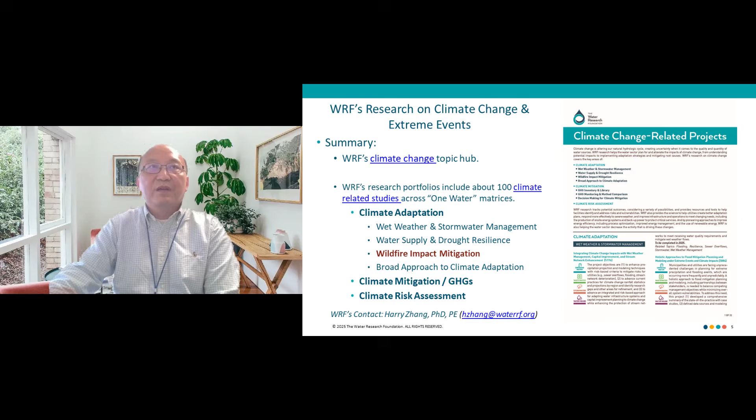Relating to wildfire-related research, on this slide I just want to give you a quick summary of the Research Foundation's completed projects, which you can use for your information, and also mention some ongoing or upcoming projects. On this slide, you can see the Research Foundation has conducted wildfire-related studies on treatment resiliency, distribution systems, source water protection, and water quality impact.

I want to call special attention: the Research Foundation is going to issue one RFP. The title, which is the last bullet here, is Ensuring Resilient Source Water Protection Programs under Extreme Events in a Changing Climate. This also covers wildfire as one type of extreme event.

So this is my concluding slide. I just want to mention two publications released in 2025, this year, including this one, which you're going to hear about in more detail. The other project focused on distribution system water quality impact and was managed by my colleague, Dr. Yan Zhang. I encourage you to take a look at that information. With that, let me pass the podium to Lynn.

Yeah, thanks, Harry. I'll introduce myself. I'm Lynn Stevens. I work at Brown and Caldwell, and I serve as our Northwest Drinking Water Area Leader. Mac and I are excited to present on our study on enhancing drinking water treatment resilience to wildfire events.

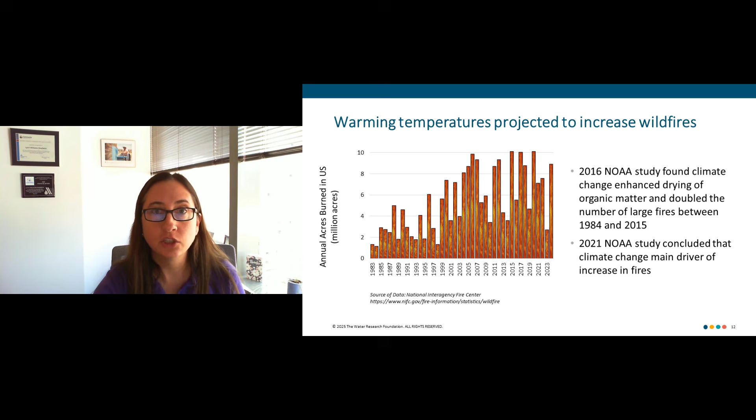So as water providers, we care about the frequency of wildfires because over 2/3 of our water supplies are in forested watersheds in the United States and Canada. So when we have a risk for wildfire, there's also an increased risk to our water supply sources. And this slide is highlighting what the potential water quality impacts can be from these wildfires. So following a wildfire event, burned vegetation exposes fine sediments and silt that then following a rain event or first flush can end up in source waters.

Specifically, we see degraded water quality and increases in turbidity, organics, and metals. And this really challenges our water treatment processes. It causes a need for increases in chemical demand, specifically with coagulants, oxidants, as well as disinfectants. And all of this increases solids loading and can stress the solids handling system. We also see that increased organics can impact our distribution system DBPs.

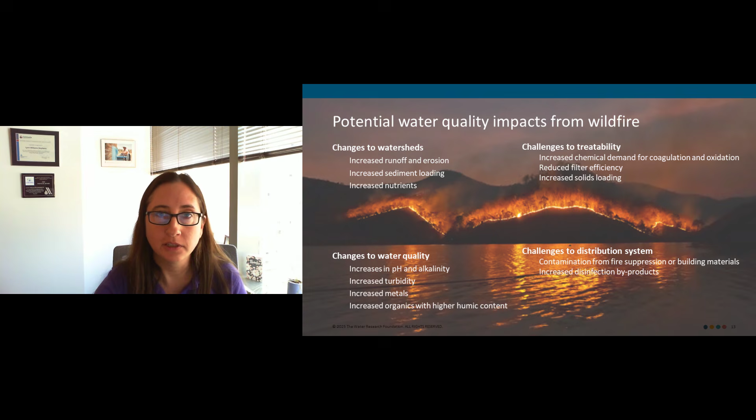So why did Portland Water Bureau want to embark on and co-fund this study? Historically, Portland Water Bureau's watershed hasn't experienced a stand-replacing fire in the past 400 years. But in an adjacent watershed in 2020, the Riverside Fire broke out while they were also planning and designing their greenfield water filtration plant. And to not let a crisis go to waste, Portland Water Bureau was proactive and collected 50 buckets of this ash to try to understand water quality impacts and treatability. And that really was the impetus for this work and this project.

And so this slide is highlighting the study objectives. There are three. The first was to gain operational treatment insight on how to treat degraded water quality from wildfires, to test treatment strategies side by side at pilot scale, and then to inform operational and design recommendations through treatment resilience frameworks.

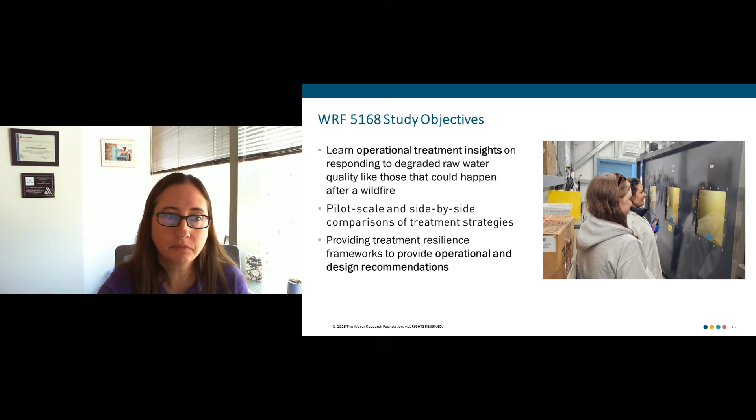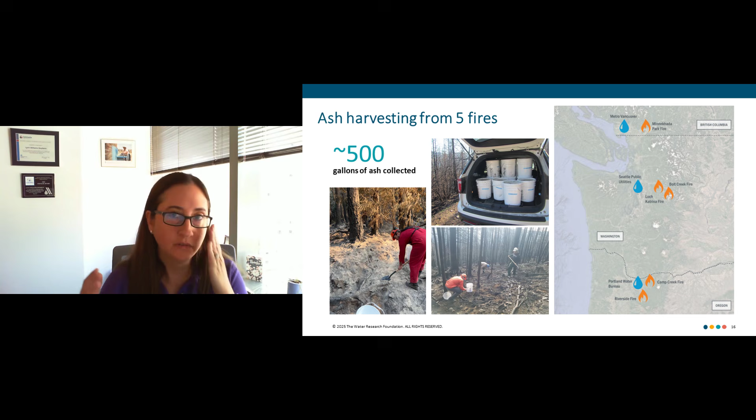So in addition to the wildfire ash that Portland Water Bureau was able to collect in 2020, our partners Metro Vancouver and Seattle Public Utilities also contributed ash. Metro Vancouver contributed ash from the Minnekhada Park fire that you see at the top of the image. And then Seattle Public Utilities provided ash from the Bolt Creek and Loch Katrine fires. And then, unfortunately, in 2023, Portland Water Bureau did experience a fire in the watershed, the Camp Creek fire. And so all in all, from these real fires that occurred in watersheds, we collected over 500 gallons of ash. And then we've utilized them in our project.

So this slide is highlighting our project approach. It first began with an ash characterization to try to think through how you mix ash with water. And then that protocol was the starting point for our bench scale testing, where we looked at different pre-oxidation and coagulation strategies. The bench scale work really set the stage for the pilot scale testing, where we compared conventional treatment with pre-ozonation to conventional treatment with pre-chlorination. And then all of this information and lessons learned really guided the treatment resilience frameworks.

Unfortunately, as much as we'd like to present all of the results from our study, we're limited in what we can present in this hour webinar. And so in the next two slides, we really wanted to highlight some of the assessments that were completed and recommend that you dig into the report to gain further insights and information.

So the first column's highlighting some of the parameters that we tested throughout the treatment process, as well as in full run raw water and spiked scenarios. What was very unique about this study was that we did it at pilot scale. So we could look at filter run times and calculate unit filter run volumes.

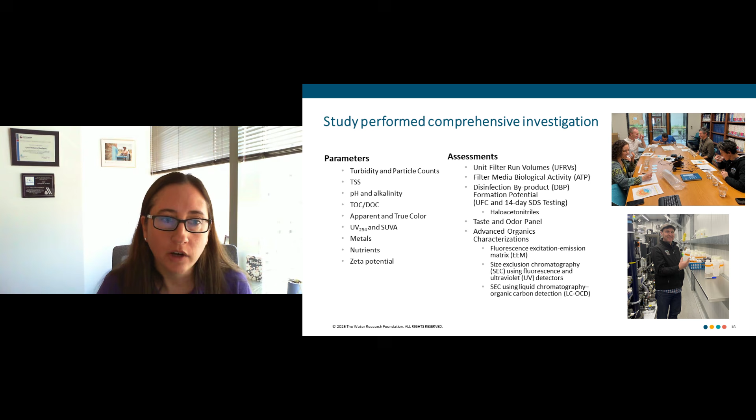When you think about wildfire and when you think about organics, there's a bunch of constituents that are comprising these bulk organic measurements, such as TOC and DOC. And we wanted to understand, how do those organic constituents shift through the treatment process, and how does wildfire impact those constituents? And so we did some advanced organic characterizations. We did fluorescence excitation emission matrix, or EEMs, and then University of Waterloo supported the size exclusion chromatography work that was done for the project.

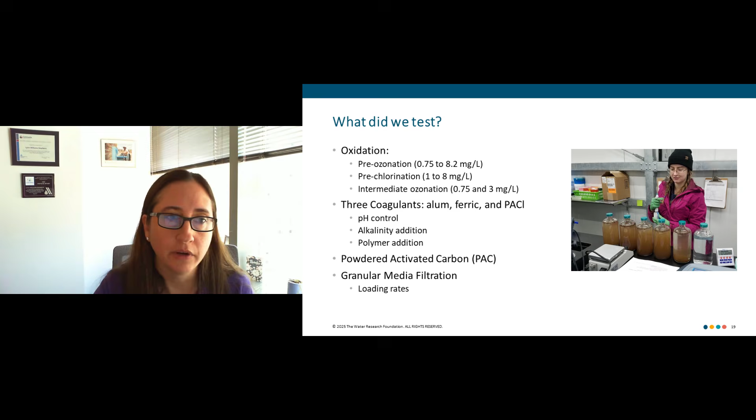We looked at a bunch of treatment processes. So for oxidation, we looked at pre-ozonation, pre-chlorination, as well as intermediate ozonation. We looked at 3 different coagulants, as well as several different coagulation approaches. Over like 25 bench scale coagulation tests were performed. We also looked at the value of adding powdered activated carbon. And then for filtration, we looked at granular media filtration with anthracite sand and examined different loading rates. So now I'd like to highlight our ash characterization and bench scale treatability findings.

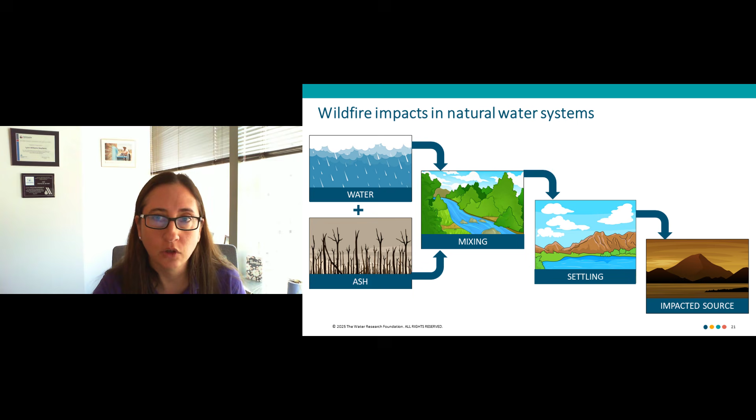So one thing we wanted to do was really try our best to simulate in this ash characterization work how a reservoir system would look as ash runs off the environment, mixes in source water, settles, and then is taken up in the intake of a water filtration plant. We didn't want to try to predict what a specific raw water quality impact would be for a specific site, because that is really dependent on your watershed characteristics, the wildfire severity, and even hydrology. The goal of this work was really to create a range of starting scenarios so we could look at treatment efficacy to those conditions, and hopefully through a broad range of scenarios represent what might happen to a specific utility.

This next slide shows our range of water quality that we developed and the average water quality conditions at bench scale. The project developed a specific protocol for mixing ash through that ash characterization work. And so the average values that you see in this plot are based on dosing 10 grams per liter of ash, mixing for approximately 60 minutes, and then settling for 24 hours. You can see the Bull Run raw water unspiked. That's the first column furthest to the left. It's pristine raw water quality with turbidity typically around 1 NTU, and organics, DOC and TOC also around 1 milligram per liter.

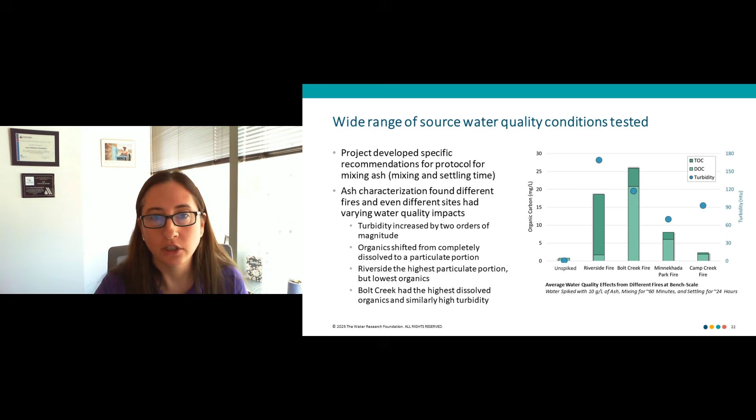You can see that when we added the Riverside ash, that the turbidity increased by more than 2 orders of magnitude, but it didn't have as great of a dissolved organics impact as some of the ashes that are shown on the slide. For example, the Bolt Creek had the most significant dissolved organic fraction from that ash, just over 20 milligrams per liter. And then we found with the Minnekhada Park Fire ash that it had more recalcitrant compounds that made it even more challenging to treat than the Riverside Fire, even though its turbidity was lower.

This next slide is showing what pre-oxidant demands looked like at bench scale. Wildfire impacted source waters exhibited a higher ozone demand. You can see the raw water or Bull Run water on the plot to the left, and then the Riverside Fire ash represented in the middle, and then the Bolt Creek Fire ash on the figure on the right. And we started out using dosages that you would typically see at a full-scale water treatment plant, which are represented with the 0.75 and 3 milligram per liter ozone dosages.

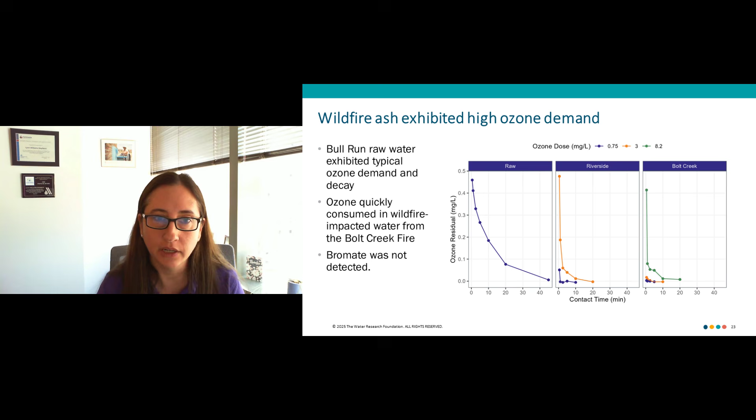We were not able to get a detectable residual after 30 seconds with the Bolt Creek Fire ash until we dosed it up to 8.2 milligrams per liter. And so based on this testing, a starting organic level as high as that range may be more challenging for a water filtration plant to treat for an extended period of time. This next slide is summarizing our findings from the ash characterization and bench scale work.

Highly recommend that folks check out the report, because there's a lot of good information in the report that we weren't able to get to in this webinar. But what we did find was that wildfire drastically increased the oxidant demand. I showed that in the prior slide, but we also saw that with coagulant demands.

And then when we evaluated the 3 coagulants, ferric, PACl, and alum, we found that alum produced the lowest turbidity, and we selected that for pilot testing and further evaluation. It was also middle of the road in terms of the dose that it required and its removal of organics, as well as not lowering pH and alkalinity to increase corrosivity of the water.

The high ozone demand exhibited at these organic levels may not always be practical. And so in pilot testing, we also investigated sub-demand dosages to see if we could evaluate and assess treatment benefits. So with that, I'm happy to turn the presentation over to Matt Gifford, who's going to talk about our pilot scale testing findings.

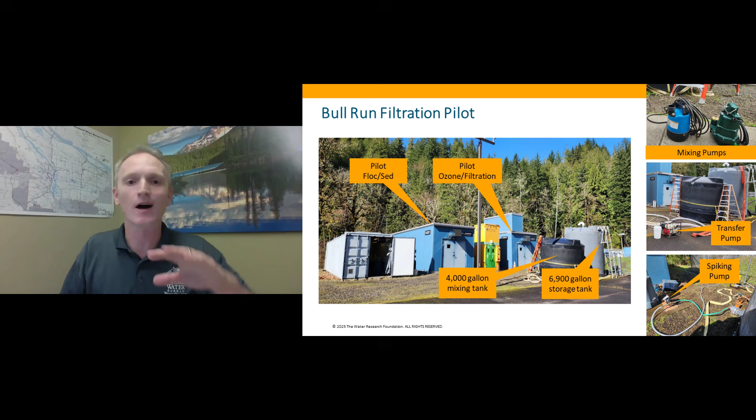The smaller black tank we used to mix up the ash, and then we could pull the supernatant over into that larger gray spiking tank. We also used a whole bunch of different pumps, some pumps there to provide the mixing, transfer pumps to move it all around, and spiking pumps, all this equipment necessary in order to conduct this work at pilot scale, which presented a bunch of unique but fun challenges.

Let's take a look at the ash and the water that were used to create these treatment scenarios. We had 90 to 100 buckets worth of wildfire impacted material, I'm loosely calling ash, to use. We were very thoughtful and intentional in knowing how much ash to mix into how many different batches of impacted water that we made up.

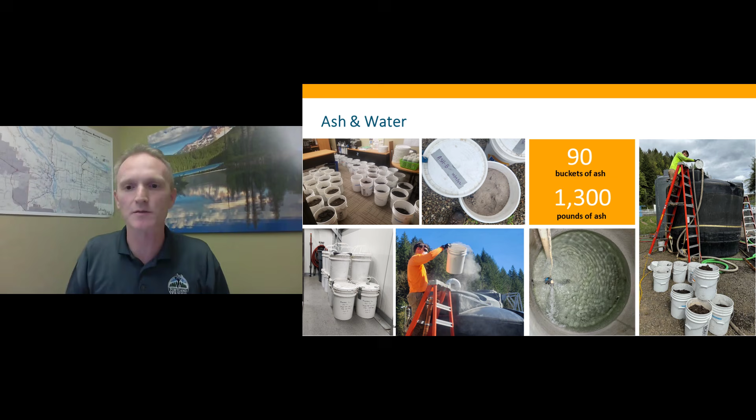There's one picture there down in the bottom center of filling up. That's looking down inside the tank, and we're filling that up with raw water directly from our intake, with a sump pump down in there that's starting to provide some agitation for mixing, but it really tries to capture some of the scale of how big some of this effort was.

And then we can look at the mixing and the settling. So over there on the left, you can see where those sump pumps are kind of buried in there, but are providing agitation and mixing energy. This is similar to what might happen after ash runs off into streams and rivers, providing mixing energy, and those water quality impacts are imparted into the water.

And we were very intentional, using results from our ash characterization bench scale studies to know how long to mix it for before we shut those pumps off and let the water settle.

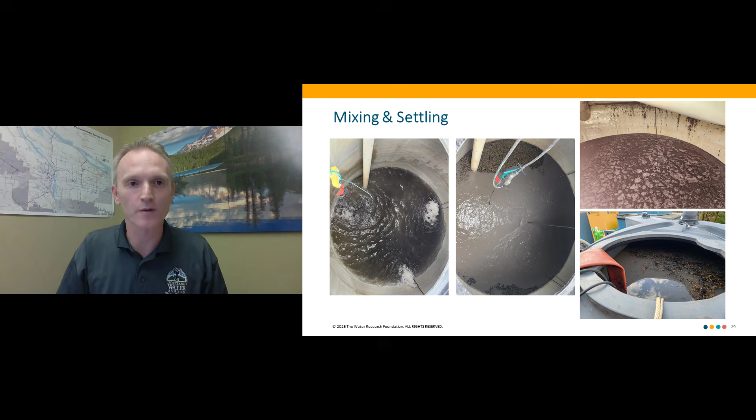This is similar to what might happen in an online reservoir or a lake, where the heavy dense material kind of falls off on its own, but that lighter fluffier material and those water quality impacts that have been imparted are going to partition off into the water. And we took that supernatant and fed it off into the pilot. But very dirty water is kind of the takeaway here. And that's a challenging day if your intake looks like that.

We were successfully able to create some meaningful wildfire impacted scenarios. So compared to our raw water there in the gray, we spiked this ash impacted water in three different distinct spiking phases. One dominated by the Riverside fire ash, and this one was meaningfully created to produce a sort of a low impact, but more chronic, long-term trade-off with turbidity and TOC and other water quality impacts, going up to a moderate impact scenario using the ash from the Minnekhada Park fire, and then that high impact scenario with the ash from the Bolt Creek fire.

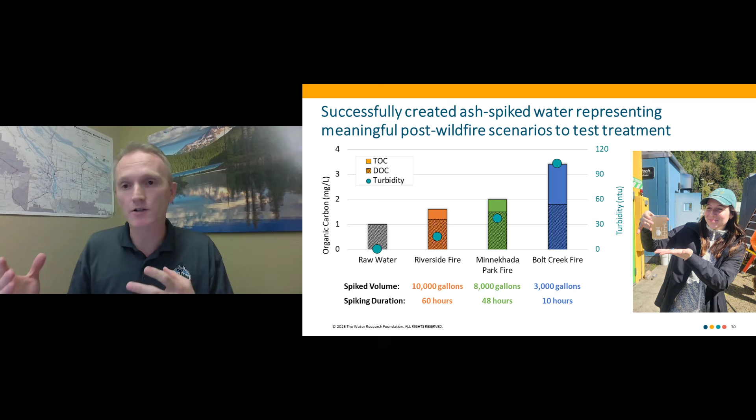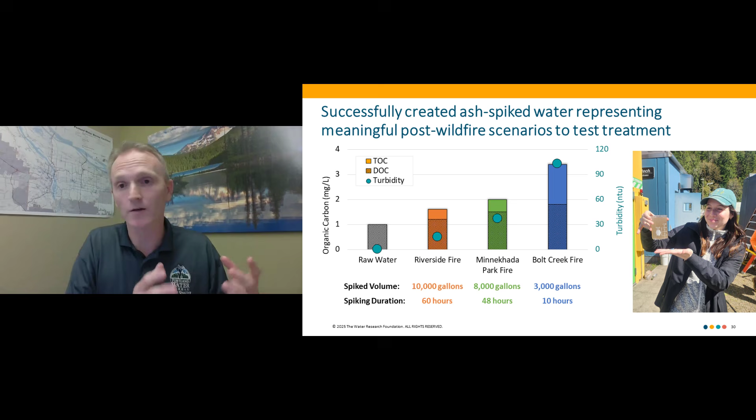There were trade-offs here. These are not super crazy high turbidity or TOC numbers by absolute standards, we recognize, but they did provide meaningful scenarios with which we could challenge our treatment systems in ways that we had never done before. And similarly, the takeaway I think here for operators of treatment plants is that in a post-wildfire scenario, you might have to figure out how to use your treatment plant in a way that you don't have any historical knowledge or historical experience to draw from.

All right, let's take a look now at pilot treatment. Now we've got the dirty water; let's figure out how to make it clean again using the treatment equipment. If we looked inside these enclosures, here are the treatment skids. These are customized treatment equipment procured from Intuitech. We have an oxidation skid, flocculation sedimentation skid, and then a filtration skid. We also did some of the bench scale disinfection afterwards. And we're going to step through what we learned through each of these steps.

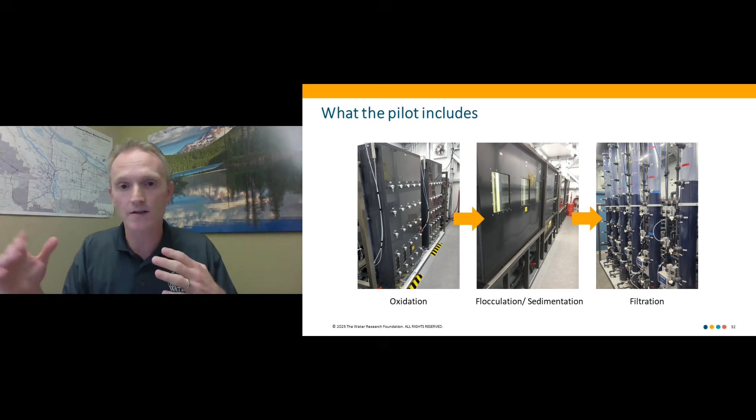What's great about doing this work at pilot scale is you get to see the interconnectedness between treatment processes. By seeing a complete treatment train, you get to see how one relies on the other, and changes here have effects here, which is really great. We also had dual parallel treatment trains, so that we could conduct a comparison side by side.

So here's the process view of how we set the pilot up in order to do this experimentation. The top parallel train used pre-chlorine as our oxidation approach. And then we could compare that to the second train along the bottom that used pre-ozone as the oxidation approach, so we could get a side-by-side comparison of those two different pre-oxidants. Both trains used a mirrored coagulation approach so that wasn't a variable. They both used aluminum sulfate, as Lynn described earlier. And then each train had 2 filters.

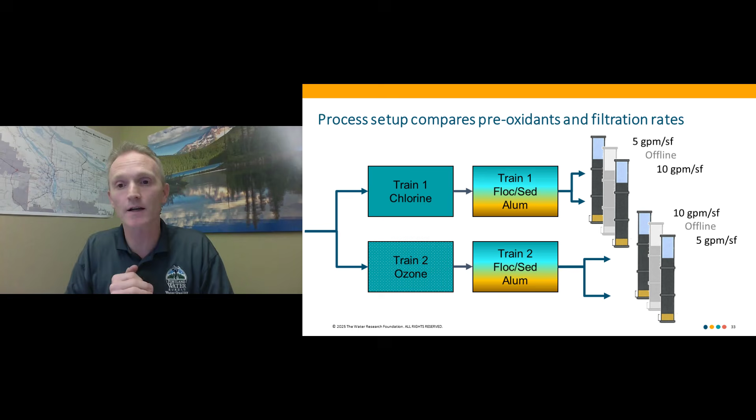So our first research question was, which oxidation approach provides resilience to wildfire? Our second research question was, what about filtration rate? Each train had 2 filters online, operated at 2 different filtration rates. One filter operated at a higher filtration rate that might represent a summertime demand or the production rate you've got going into your degraded water event. And then a parallel filter operating at a lower filtration rate that might represent more a wintertime demand or an intentional turning down of your production rate as an operational response to your degraded water.

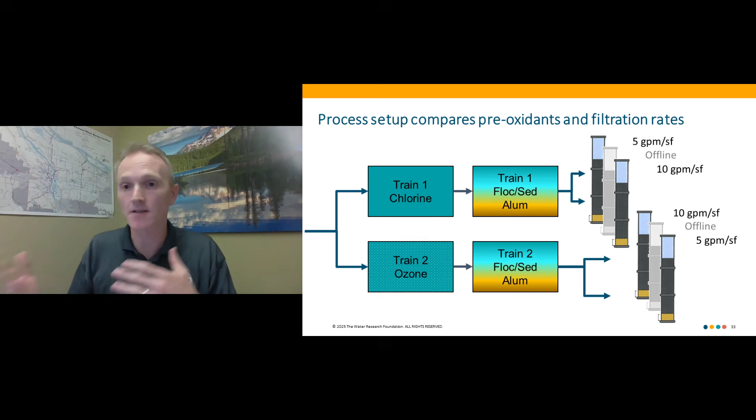So we're going to keep an eye on those 2 variables, pre-oxidation and filtration rate. Let's step through each treatment process and see what we can learn from each one, starting with pre-oxidants.

So on this slide, we've got demand and decay curves for pre-chlorine on the left and pre-ozone on the right, showing the applied chlorine dose and how the residual went through the treatment process, and then the pre-ozone dose on the right and how that went through the contactor. The real quick takeaway is that both oxidants got absorbed very quickly in these high organic scenarios that are possible after a wildfire. It absorbed a lot of that oxidant really quickly in both scenarios.

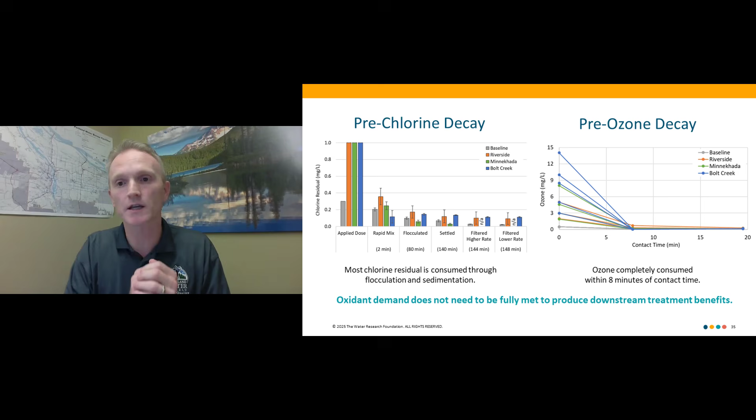For the chlorine, there was very little. We applied doses of up to 1 milligram per liter. We don't want to go much higher than that. We're not trying to provide CT. We're not trying to provide disinfection here. We're just conditioning particles in order to be removed in subsequent treatment steps.

So that residual was mostly gone by the time we got through flocculation and sedimentation, and then by the time it was hitting the filters and coming out of the filters, it was mostly non-detect, which was fine, which is what we wanted. Ozone decay, we were usually applying around 1 milligram per liter. For short periods, we spiked it clear up to even 14 milligrams per liter, and still couldn't really detect much of a residual by the time our first detector there at 8 minutes of contact time.

The takeaway message here is that a pre-oxidant, even if it's consumed, does still provide downstream treatment benefits, even if it doesn't carry a residual for very long. Now let's take a look at coagulation.

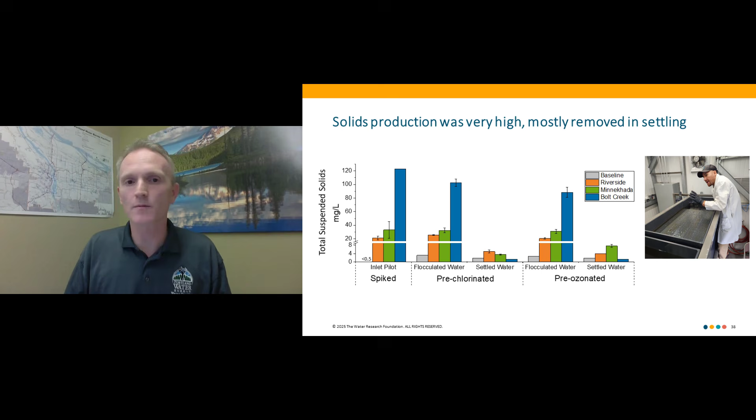Even our peak solids, we were producing up to 100 milligrams per liter, 120 milligrams per liter, 30 times more solids than normal. Even the long-term chronic conditions, we're still producing something like 5 times more solids than a standard condition. Most of that was removed through settling. It was gone by the time it got to the settled water, which is what settling basins are for. But it gives you an indication of what that treatment facility needs to be ready to handle to respond to these challenging scenarios.

All right, let's go on to filtration next. We're taking a look at our pilot filters next. And this is one of the parts I'm kind of most excited about, because this is one of the things that's really difficult to see at bench or full scale, but was really able to shine through at pilot scale. Let's take a look at filter runs.

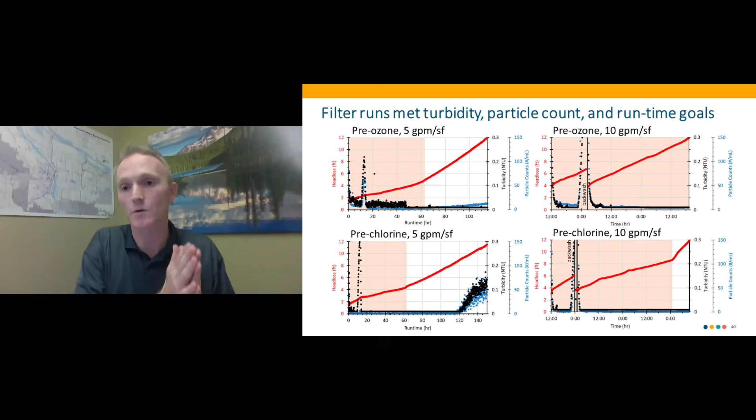But this was a great example of how slowing down your filtration process, slowing down your production rate, really gave you an increased operational window, really gave you increased flexibility for responding to a degraded scenario, which was really, really super interesting.

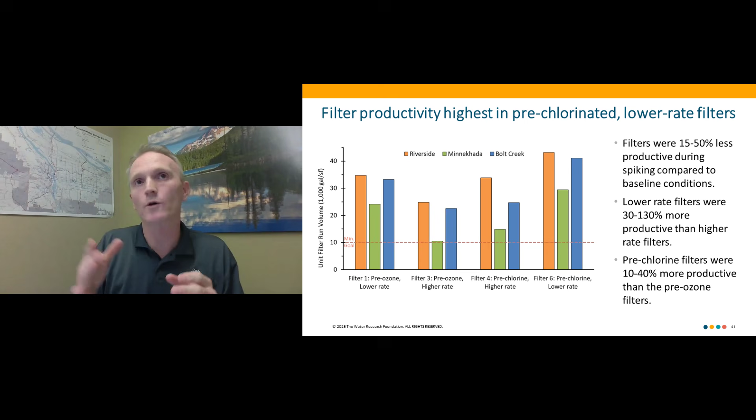Even though they were only producing water half as fast, they lasted more than twice as long, so increasing their overall productivity. So that's why they had 30 to 130% more productivity at the lower rate. And again, showing kind of the benefit of slowing down your process.

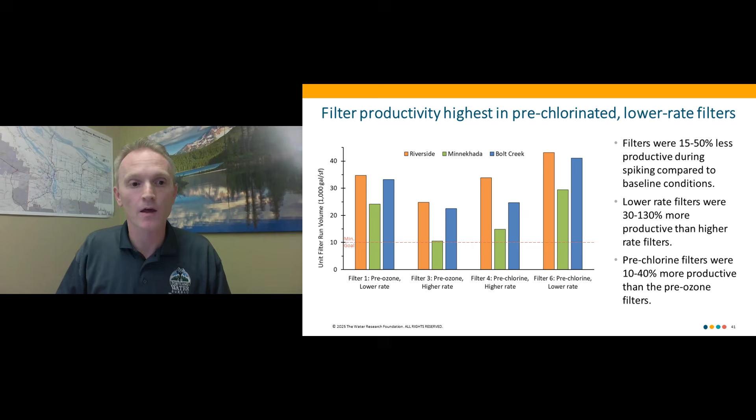Comparing the ozone filters, the 2 sets of bars on the left, versus the chlorine filters on the right, what you see here is that the chlorine filters, the ones that got pre-chlorinated water, have higher productivity. They were somewhere in the neighborhood of 10 to 40% more productive, having higher run times than their pre-ozonated counterparts, which is a benefit of using chlorine as your oxidant. There was a trade-off there, though, with organics.

And so here's the slide on bulk organics, TOC and DOC. The bar graphs show TOC and DOC through the treatment process, and the dots are capturing ultraviolet light absorption at 254 nanometers. And here what you see is that both the chlorinated filters and the ozonated filters removed the organic material out of the spiked water, met all regulatory and water quality standards, got back to acceptable levels with acceptable percentage removals, so both the chlorine and the ozonated strategies worked.

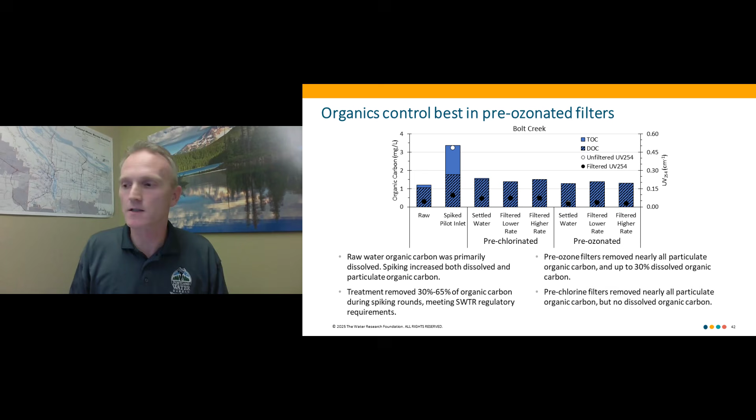But the ozone here really shows its value, because especially the UV254, you'll notice, is about half in the pre-ozone filters compared to the pre-chlorine filters. So that sets up an interesting trade-off between the pre-chlorine filters that are lasting longer versus the pre-ozone filters, which are removing additional organics and therefore running slightly shorter. And that also shows up in disinfection.

And so now we took some of that filter effluent water and ran it through a DBP assay so that we could get an idea of disinfection byproducts. You should go check out the full report if you're really into DBPs. We've got some results using uniform formation conditions here. We've also got results from simulated distribution system conditions, and both regulated and unregulated DBPs, including haloacetonitriles, some interesting things. But let's take a look just briefly at our regulated DBPs that were created in our uniform formation conditions.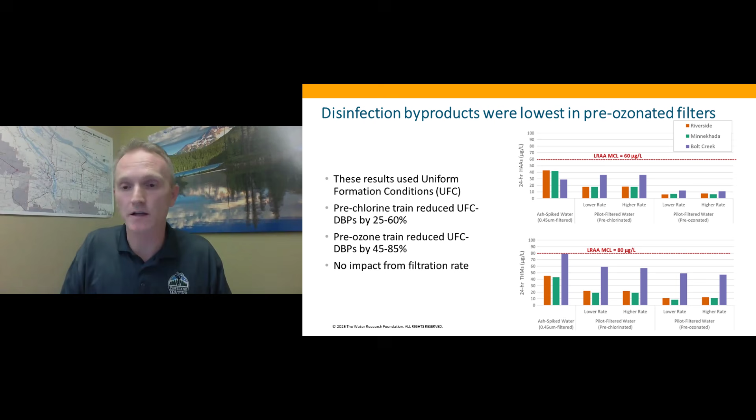But you do see that because the pre-ozonated filters were removing more organic material, they had about 50% lower DBPs than their chlorine counterparts. And the chlorine filters did still have 50% as much DBPs as the spiked water. So all met regulations and standards. You got additional benefit with ozone.

All right, I'll summarize really quick. Just taking away the pilot lessons learned. We successfully made really dirty water in meaningful and intentional ways that challenged our treatment processes. And then we demonstrated making really, really clean water that met regulatory and customer expectations.

Going back to our research questions, summarizing our research questions of what about the two different preoxidants, both using pre-chlorine and using pre-ozone as oxidants successfully demonstrated treating water and providing resilience towards responding to a post-wildfire scenario. The trade-offs, the benefits of using pre-chlorine was that you got slightly lower coagulant doses. I didn't go into that here, but slightly lower coagulant doses. And you got those extended filter run times.

The benefits of using pre-ozone was that we had lower organic carbon in the finished water, which resulted in lower disinfection byproducts. And also the pre-ozonated filters rated best for taste and odor.

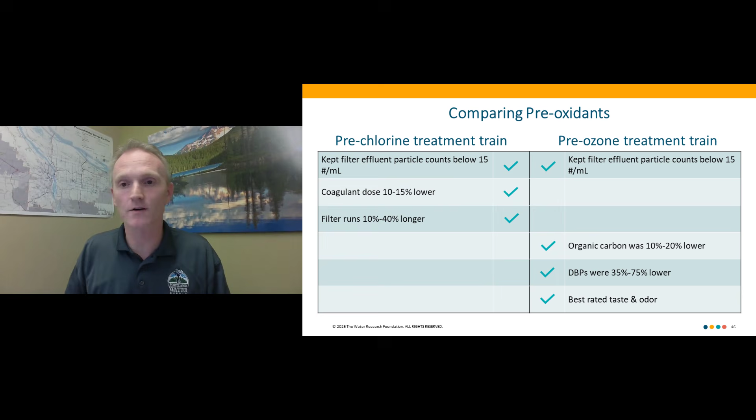And our second research question on comparing filtration rates. Here's our table. Both the high rate filters and the lower rate filters were able to meet filter effluent particle count and turbidity goals and productivity and filter runtime standards, which was great. So they're both viable options.

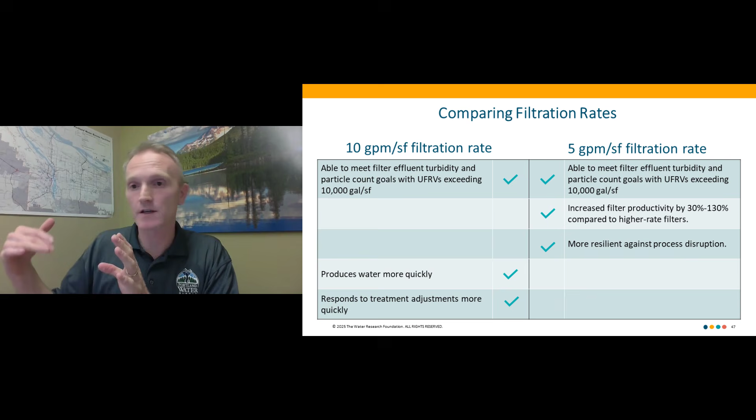But the benefits of slowing down your process, using your lower filtration rates, that did increase your productivity, increase those UFRVs and your runtimes, and was more resilient against upstream process disruptions, gave you a larger window to operate within. The benefits, I would say, of sticking with the higher filtration rate, is that you're able to process water more quickly if you need to keep people in water, keep the system pressurized, and it also responded to treatment adjustments more quickly.

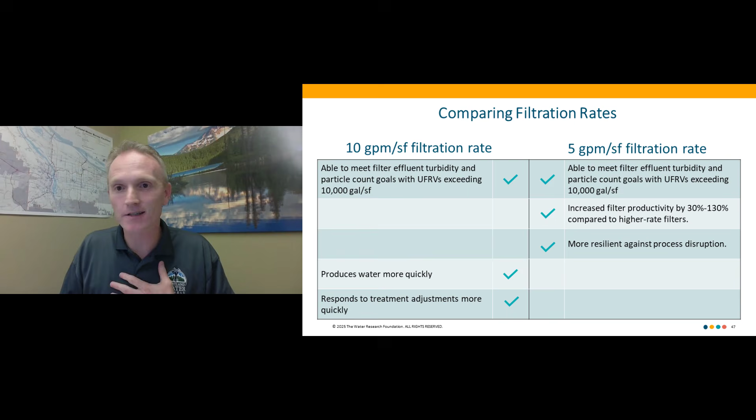All right, I think that's it for me. So I'm going to go ahead and turn it back over to Lynn to give us some summaries of the frameworks that we developed. Yeah, thanks, Max.

So we looked at treatment resilience frameworks, and we broke this down into 3 categories: monitoring tools and assessments, operational responses, and then infrastructure improvements. And we'll highlight each of these 3 categories and how they can build into a wildfire response plan. So let's start out with the first, which is monitoring tools.

Specifically, the report highlights which parameters are most beneficial and at which locations to monitor them to inform decisions and operational adjustments. It's important to develop thresholds that, when exceeded, you would make a change in your operational approach, or potentially even shut down and rely on a backup supply.

Monitoring really starts at the watershed so that you can be as prepared as possible to potential shifts in source water quality. Additionally, by monitoring water quality in the watershed, it may allow you to employ BMPs to reduce the impact to your source water in the first place. So this can include water quality monitoring in tributaries, looking at runoff impacts from burned and unburned areas, and then online monitoring in your source water itself.

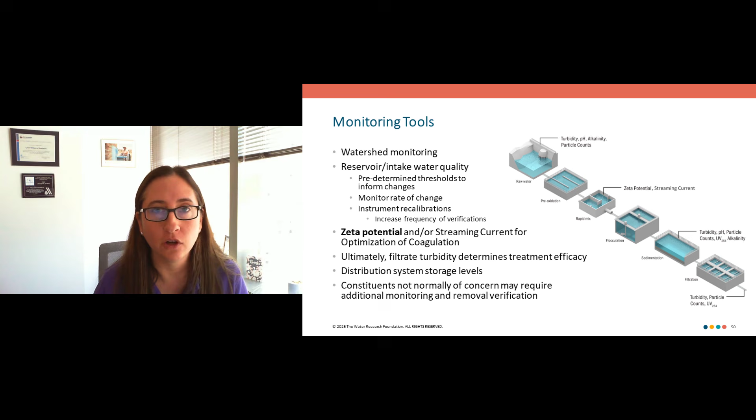It's also important to think about how your water treatment plant is interacting with your distribution system. And so monitoring the distribution system storage levels and thinking about whether you should maximize those so that you can slow down your plant, or whether you are in a low demand period, you actually need to lower those to reduce your water age because of DBP concerns.

The next slide is highlighting operational responses. And really a big takeaway from this study is that there's value in slowing things down and allowing more time to react. And so what we saw was both filter loading rates were effective, as Max said, at producing high water quality, but the lower filtration rate could handle an unoptimized coagulant dose as well as a brief equipment outage. And so thinking about that for your facility and slowing things down and then recalculating your hydraulic residence time, understanding as you make a shift in a coagulant dose, how long will it take for that shift to be seen in your filtered water quality?

One option that we proposed is to have one filter at a higher rate to be kind of more your canary in a coal mine and understand the sensitivity of your dosing strategy while operating the rest of your filters at a lower rate for improved resilience. This will also potentially allow for understanding in a quicker time period if your dose is off.

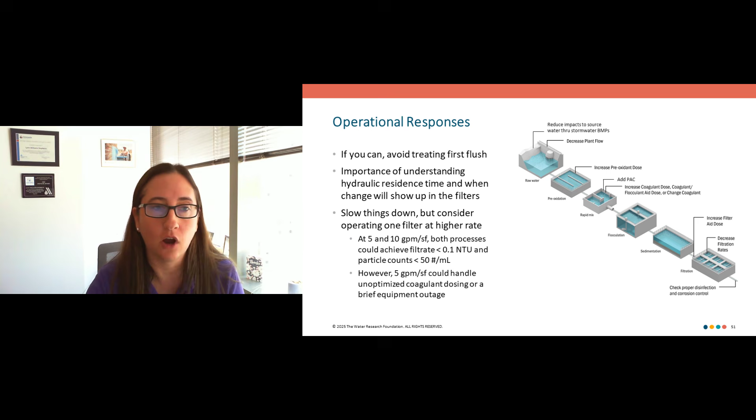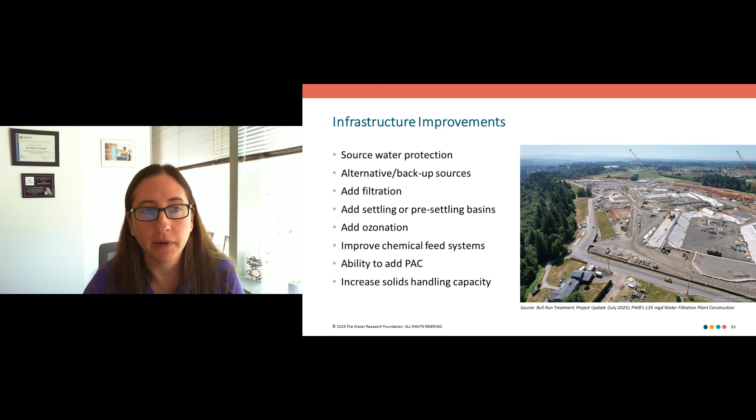The next slide is highlighting infrastructure improvements. Depending on what treatment processes you have right now, there may be changes that you want to make for increased resilience. The report walks through each of these options and some considerations. All of the ash-impacted water quality conditions that we explored in this study would exceed the turbidity requirements for unfiltered water supply. Many water sources in the Pacific Northwest have very low solids and turbidity and are amenable to direct filtration. However, as wildfire degrades source water, we saw very improved resilience from having sedimentation. And so this study demonstrated the benefit of these different processes, and I recommend you dig into the report more so you can learn information about each of these infrastructure improvements.

Okay, so what can you do? As demonstrated through this study, it's important to be prepared for wildfire events, and they can be very site-specific and cause varied impacts to source water quality. A wildfire response plan can really help you prepare to think about how you're going to react to immediate impacts as well as prolonged long-term water quality impacts. Components of this wildfire plan can include prioritized lists of treatment modifications based on defined trigger points, critical monitoring and control points, and having SOPs in place.

We developed a few scenarios that were challenging to treat, that would be for an extended period of time. And additionally, wildfire could impact our water infrastructure in our forested watersheds itself. And so it is important to think through what is your backup or alternative water source or emergency connections that you have in place.

Communities rely on safe and reliable drinking water, even during an emergency like a wildfire, and responding to those emergencies can be challenging and create a lot of pressure for operators, engineers, and managers. There's a great benefit to planning and preparing as much as possible before the challenge occurs. This study looked at how drinking water systems can increase their resilience to wildfire by investigating different treatment approaches. And so the best defense against a wildfire event is to develop a plan for how your utility will prepare. And so we encourage you to look at our report, to look at the different treatment processes and their efficacy, and to see what could work best for you.